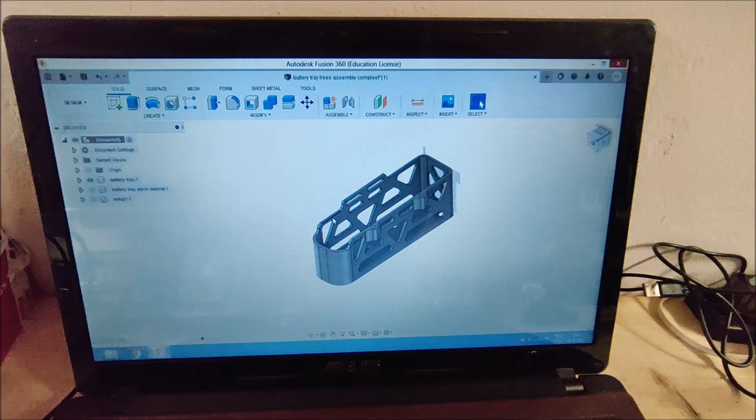Today I want to try to machine this small battery tray to house this battery in the side of this robot project I'm working on. It's a part that can be machined on a 3-axis machine, but since I now have the 5th-axis trunnion, let's try to make it on there, because this part at least has 4 sides to machine. This side, that side, from the top, and there are holes on this side.

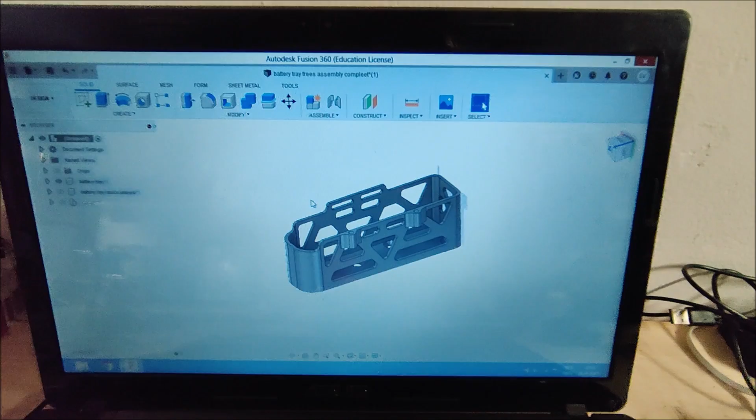So this is the end part. I modeled the stock around it, where we're gonna machine the part out, and I have my trunnion dovetail clamp. So here you can see where we're gonna hold the part.

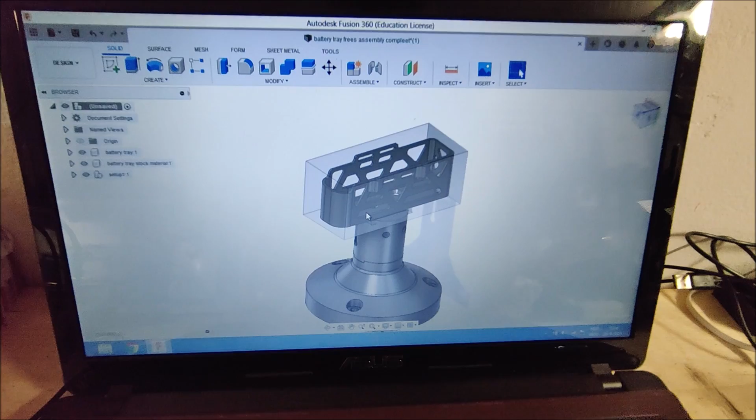I want to try to record and explain the steps I'm gonna take to make this part. I'm not sure if I'm gonna take the right steps, because it's the second time I'm gonna machine a part with the trunnion, so I'm not sure if it's gonna be the right workflow, but let's see, and maybe we can learn some things today.

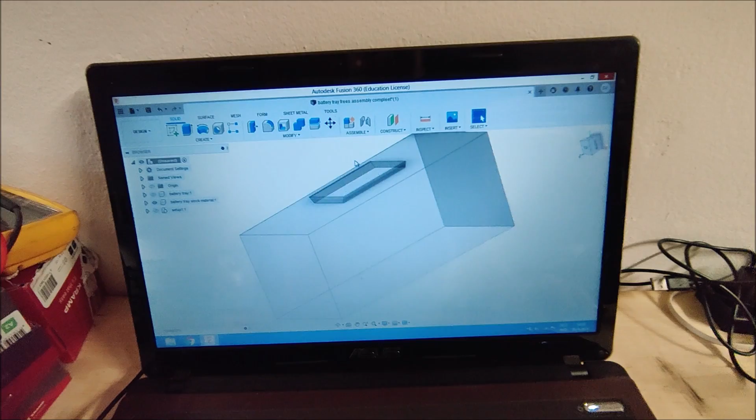So the first thing I need to do is machine this dovetail on the stock material. Just do that in the normal vise, and then after that we can grab this piece of material in the trunnion. So let's make the program to cut the dovetail, cut it, put it in the trunnion, and then I will explain how I set the Z height again, like I explained in last video.

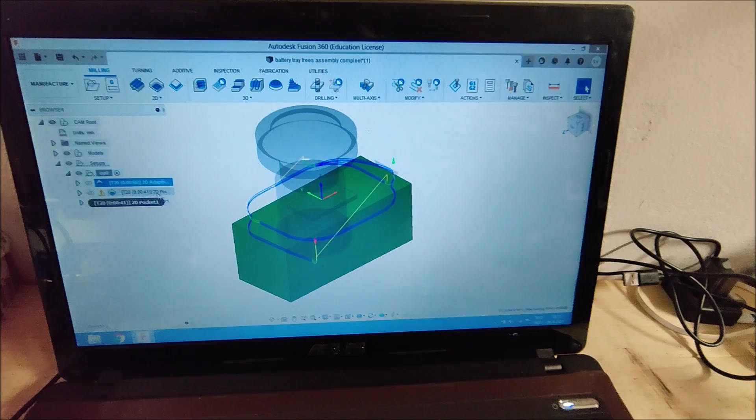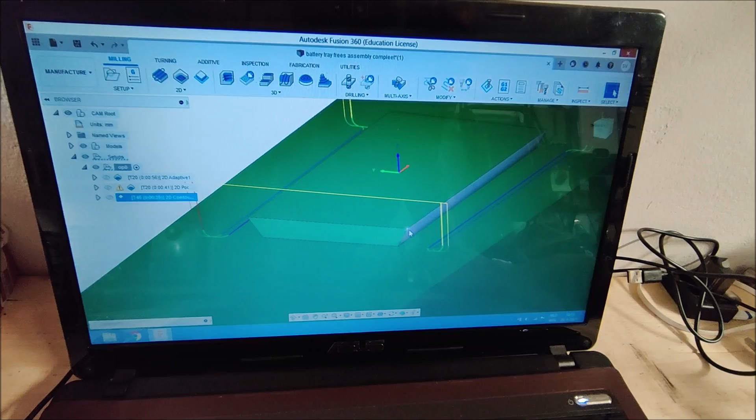I created the program for op0 to machine the dovetail. So first thing is rough out the top material with the face mill, then finish it so only this square remains, and then use the dovetail cutter with some multiple passes to cut the actual dovetail, and that should be enough to hold the part in the dovetail vise.

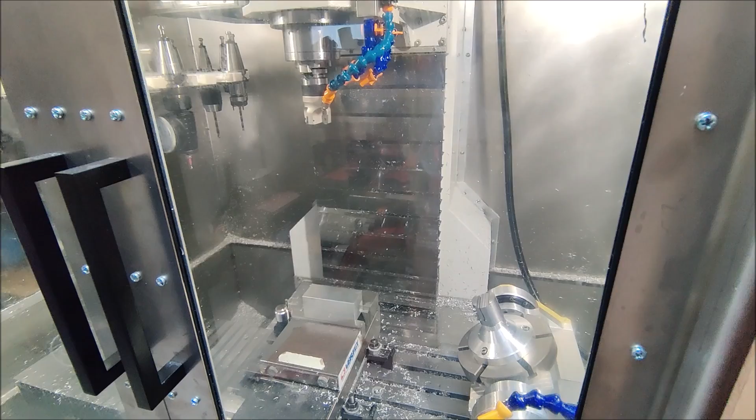So let's put the material in the vise, set the 0 point, and run the program. I loaded the stock material, set the 0 point, and did the spindle warm up. So now let's run the program.

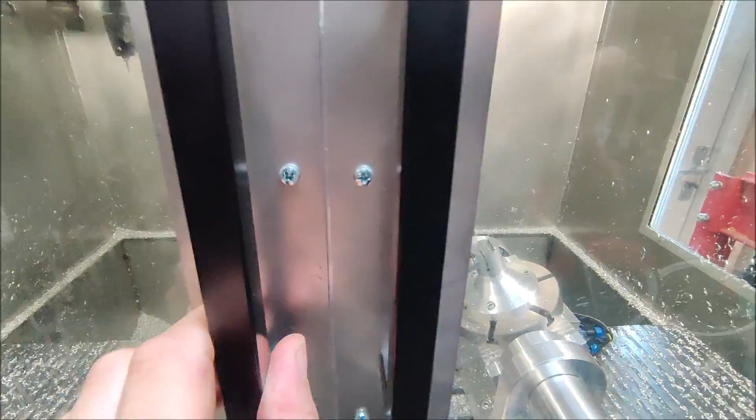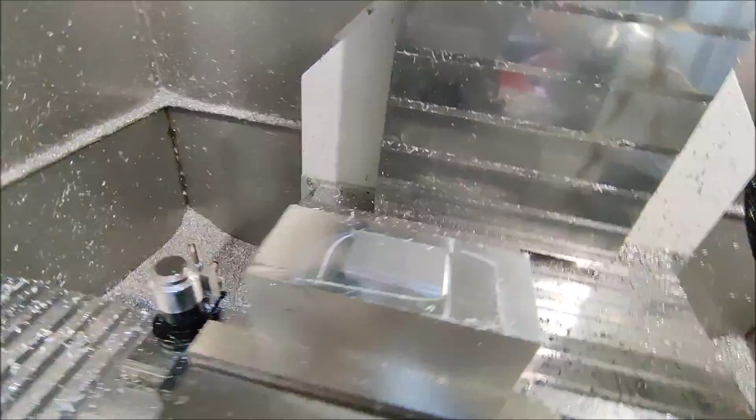Now let's run the dovetail cutter and cut those dovetails on the side. Loaded the dovetail cutter, let's run the next program. So now we can transfer the part to the dovetail, and then set the 0 work point for this stock material.

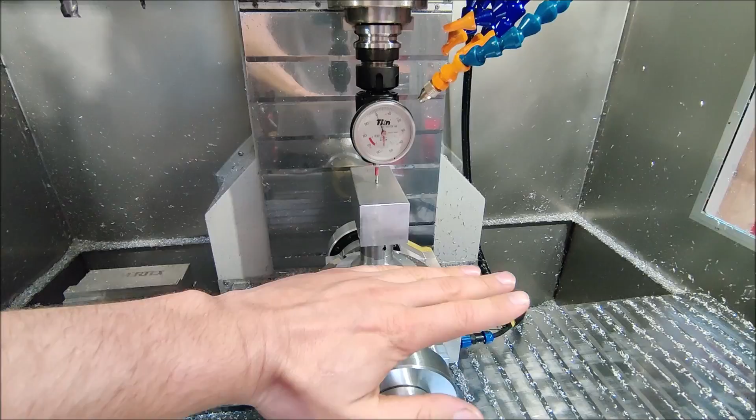I mounted the part in the dovetail clamp, and I made sure that this side is parallel to the y-axis now, and I set the c-axis to 0 degrees in this position. The b-axis is now also at 0 degrees, and it can tilt down to -90 or +10.

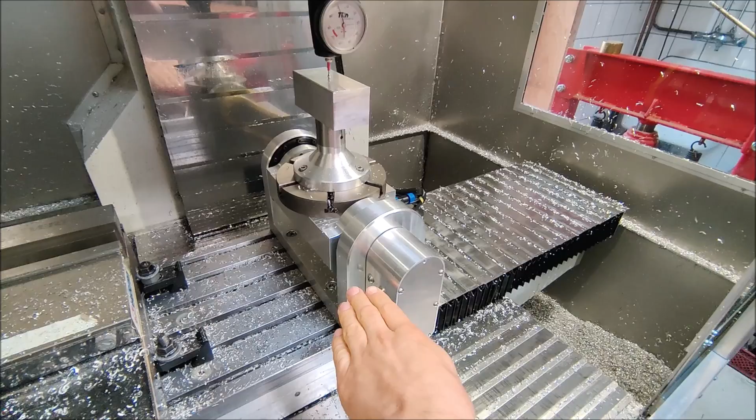Because my controller doesn't have the tool center point control, my work coordinate system is in the middle of each rotation axis. So I need to set the work coordinate system somewhere here in the middle of this axis and this axis. The only thing that is unknown for me is where the part is in space relative to the work coordinate system.

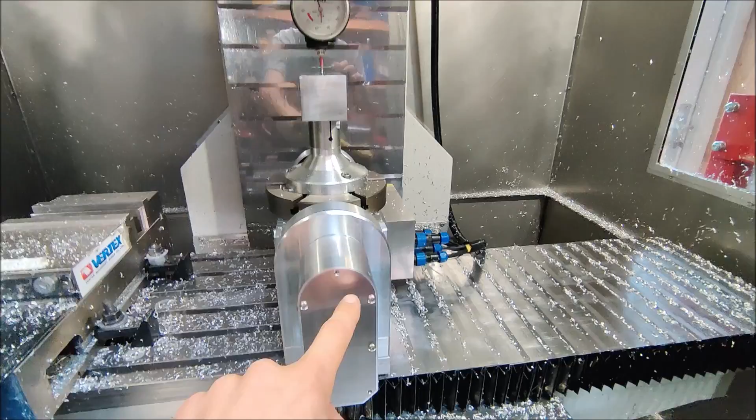So what I do is I put my machine in G55, the work coordinate system I use for this trunnion, and then I use the Haimer to measure the top of my stock part. I know that the 0 point is here. I put the Haimer here on 0, and then I can take the height difference to model up the top of the stock in Fusion.

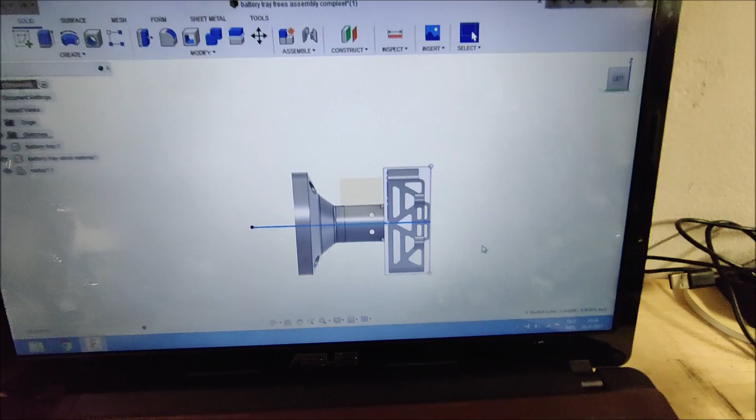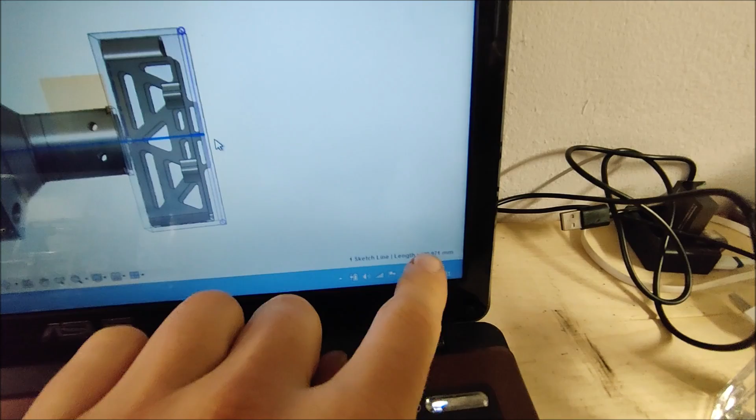So let's go back to the computer and make a sketch, so we can set the work coordinate system offset from this point to below there. So what I did is I made a sketch on the center plane straight through the middle of the part, and I drew a line which has exactly the length that came out of the z-axis measurement, and then I created a point on the end of the line, and this point will be the work coordinate system center point. So from now on, Fusion will know where the stock is relative to the 0 point.

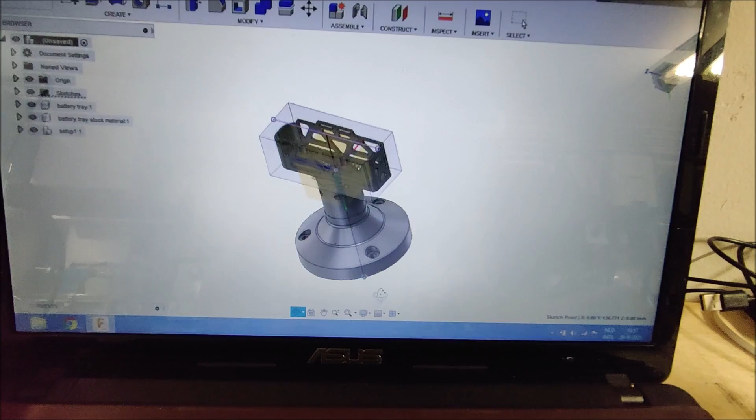This is now how the setup looks. You can see the coordinate system is at the bottom of the point of the sketch, and the x-axis is in line with the long side of the part, just like how it was now fixtured in the machine.

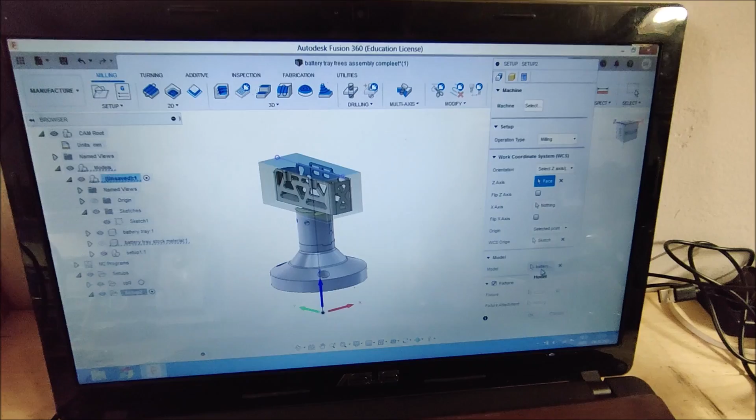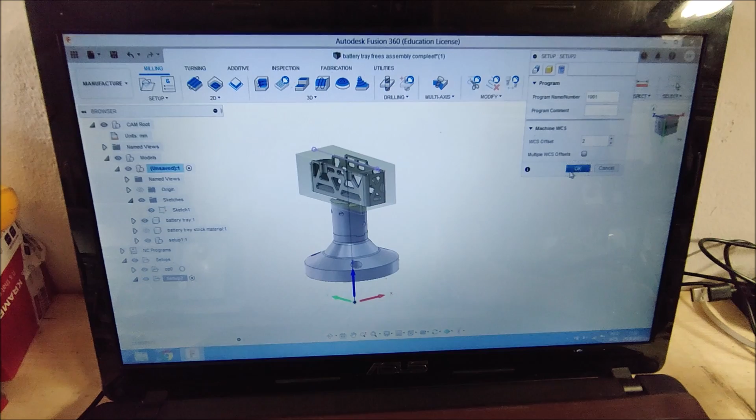For the model, I used the model of the battery tray. I set the fixture, I set this part, and for the stock I used the modeled up stock, and I did a work coordinate system offset, so it will output the program in G55. I already made this mistake, don't do it, and then the machine stays at G54 and you get some interesting things. Luckily I was in time to catch the problem. So now we have all this set, we can start making programs on machining this part.

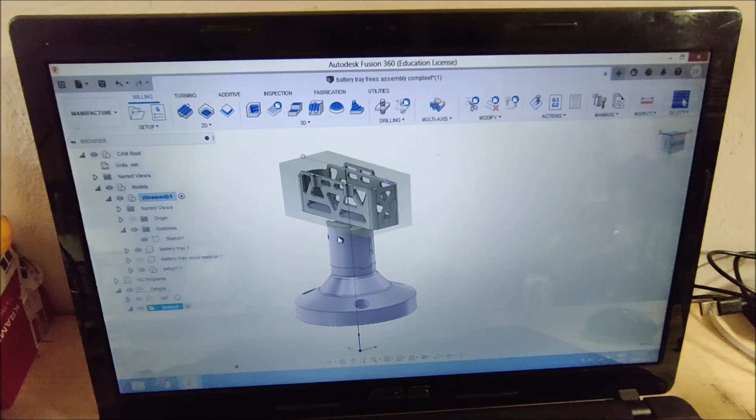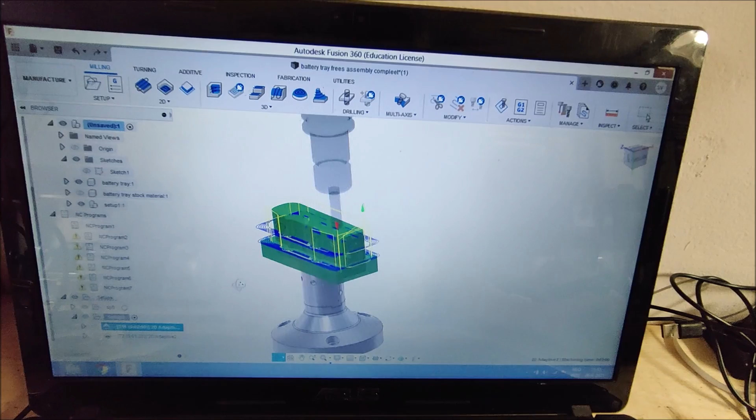I created the first 2 programs. They will rough out the outside to the shape of the outside contour, first with a short 10mm tool, and then with a longer one to reach the bottom. For this operation the trunnion doesn't have to move, I can just stay straight up, just like it's a 3-axis move.

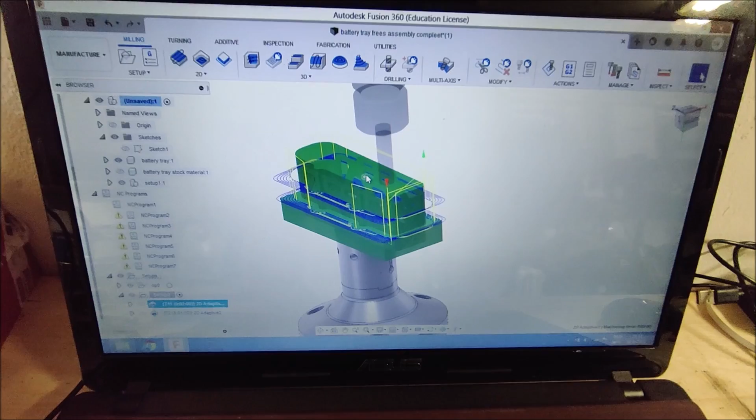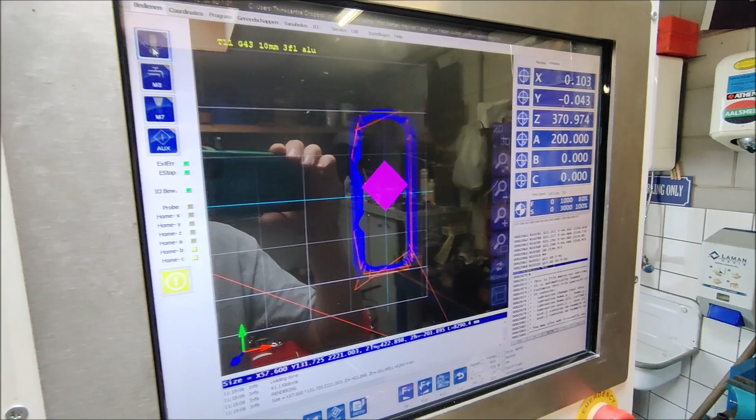I first want to finish the outside contour like this, while the part is still as rigid as possible. If there will be some chatter on the inside, I think it's less of a problem because you will not see it, but I want to try to make the outside as clean as possible. So let's run this program and see how that goes. The program is loaded for the first step. I'm gonna hold my hand on the feed control so I can see what happens in the first stage of the program. So let's run it.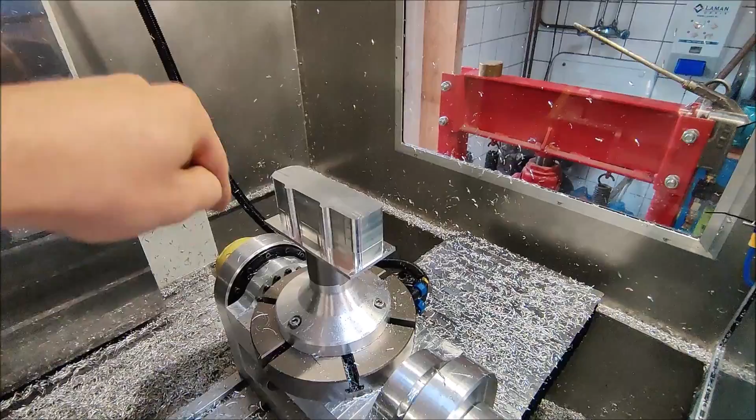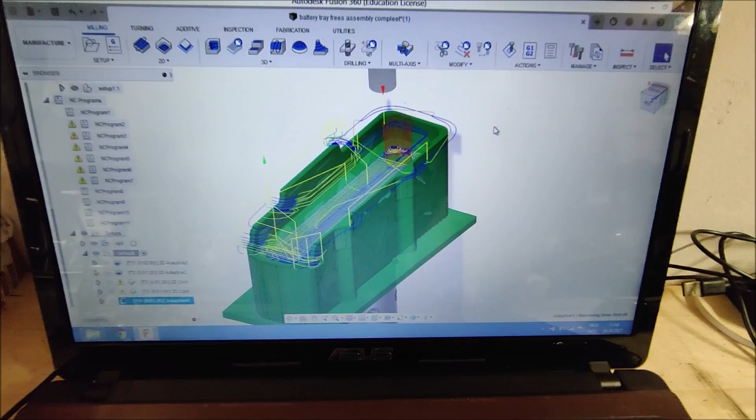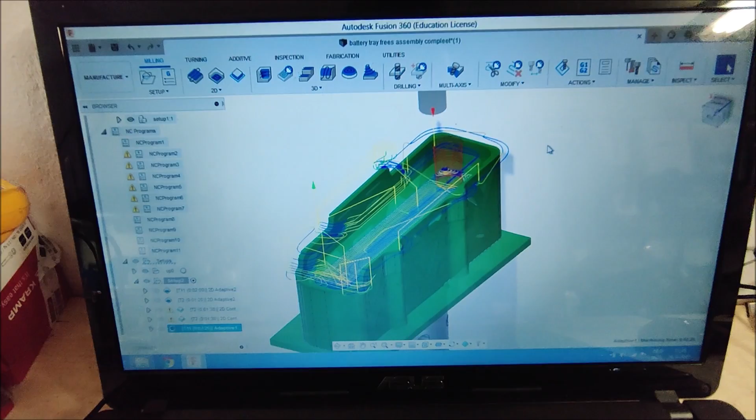The outsides have now been roughed out. Now let's make a program to finish the outside contour, and then let's work on the inside. Now that the outside has been finished, the next step I want to take is 3D rough the first 15 millimeters from the top part, so the top layer will get exposed, and I can finish that while the top part is still rigid. So that's what I'm gonna do now. First rough it, and then we're gonna finish this whole outside part to make it look good.

The first 15 millimeters have now been roughed out. What I want to try to do is use a 6 millimeter end mill and machine from this side to finish this half, flip it, and then machine this half, and then I can also see how nice, or if it's aligned at all, to see if you can see a mark in the middle. If the end mill goes from this side and this side, what will be the difference in the middle. So let's make the program, and then we can also use the 3+2 function and tilt the trunnion. So let's make the program for the machining on the side.

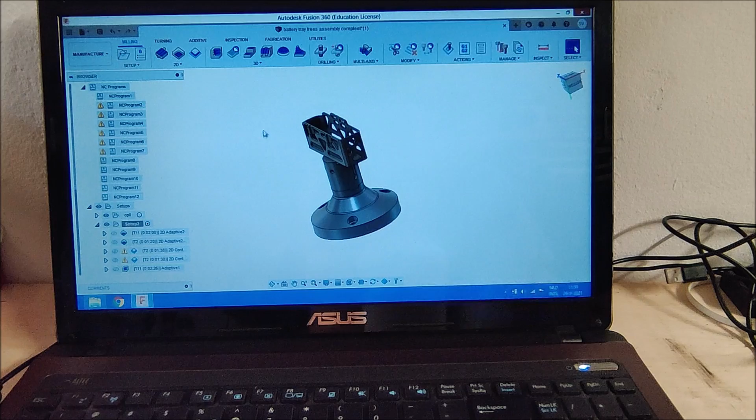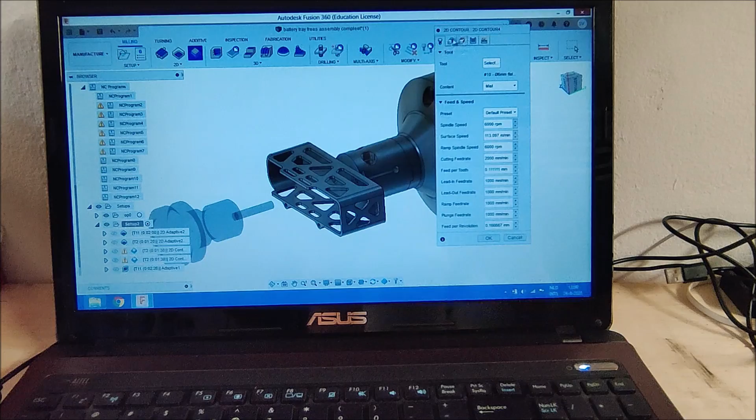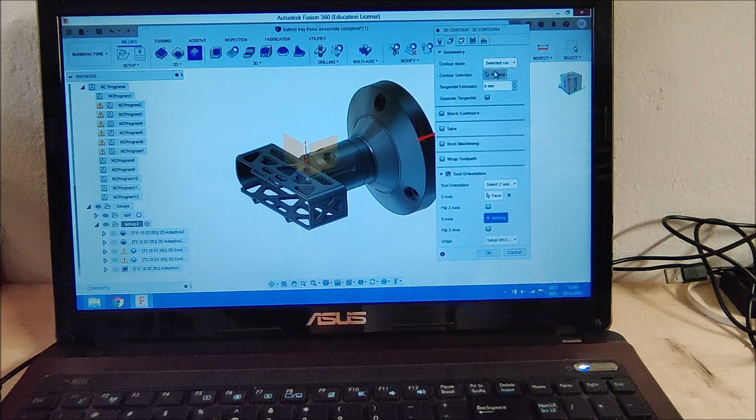So what we're gonna do is select contour, tilt the trunnion like how I want to have it, and first thing we need to do is select the right tool, and then tool orientation, and we need to give the trunnion a new z-axis. So you can see the z-axis now pointing upwards. For x and y you don't have to touch it, Fusion will figure it out itself. Then we can select the contour, and all I want to machine is this side, so I'm gonna mark what I want, okay, and from the top it will look like this.

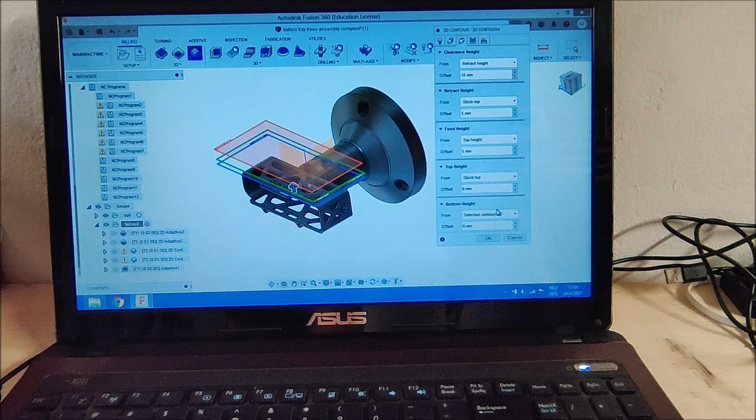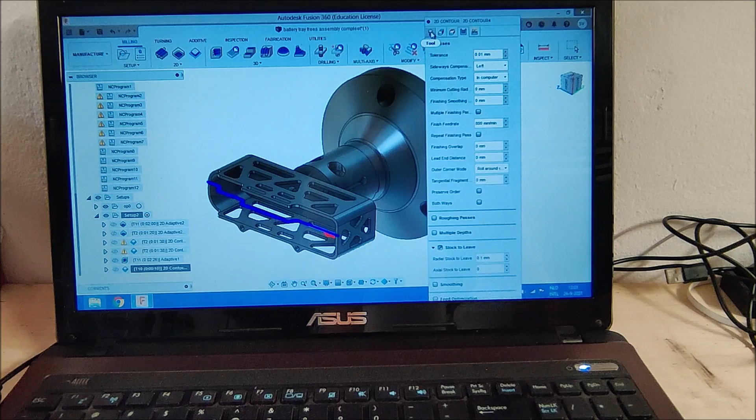And then I need to set the right height, and I want to go here, -10, which will be exactly in the middle. So let's do 0.5 millimeter deeper, so we have some overlap between the two passes on each side. And I will set top here, and that should give us our program. So I'm first gonna do it with a stock to leave of 0.1 millimeter, and then I can first verify in the machine how the program looks, and then we still have the 0.1 millimeter escape if it doesn't turn out how I want to have it. So let's post it and put it in the machine.

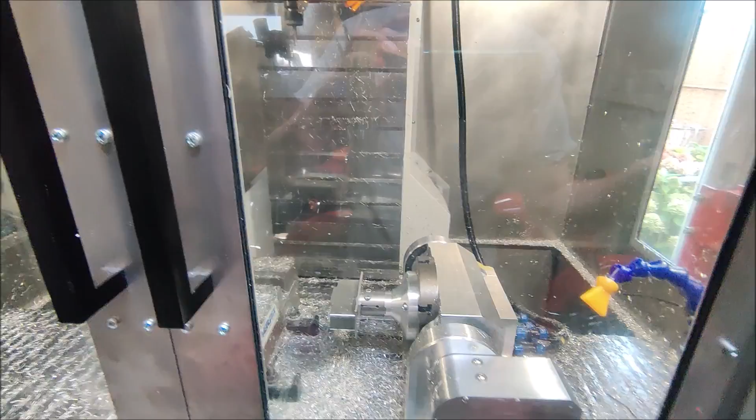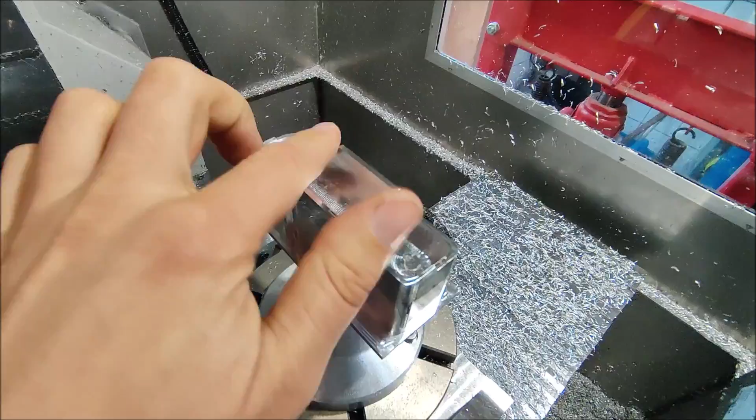I loaded the program and loaded the tool already. Let's run the program. I'm gonna hold the feed button again to see if the trunnion does what I want it to do, and see how it's gonna turn out. Okay, that looks like what I wanted. Now the question is, if we rotate the Z-axis, put B down, and we do exactly the same thing on the other side, how this intersection will look. So let's make that. I will make that program, and then we're gonna put it in the machine and see.

I loaded the program for the other side now. I'm gonna put the feed low, so first I want to see how the trunnion is gonna move, and let's see. Yeah, looks good.

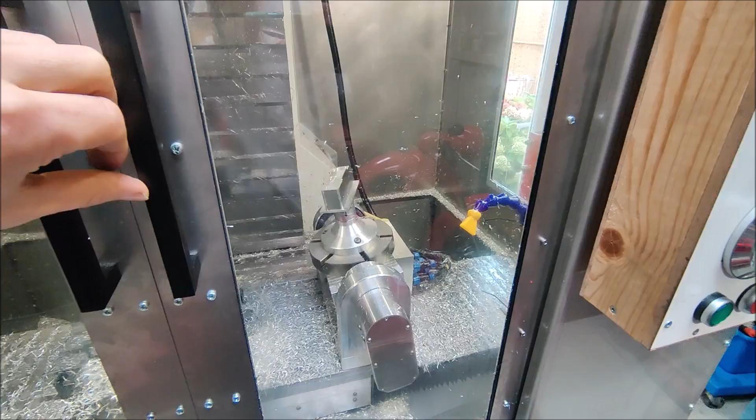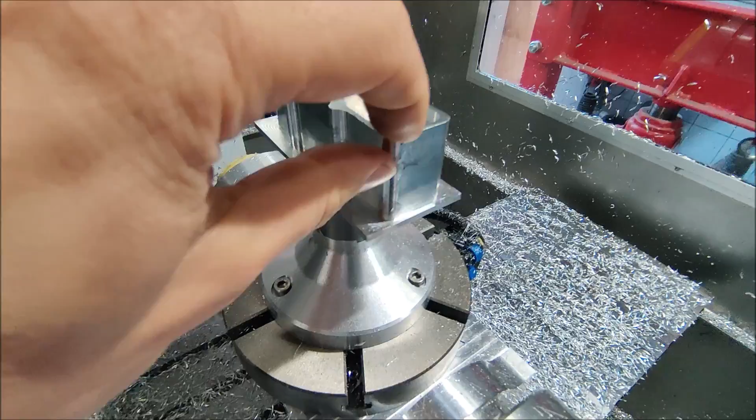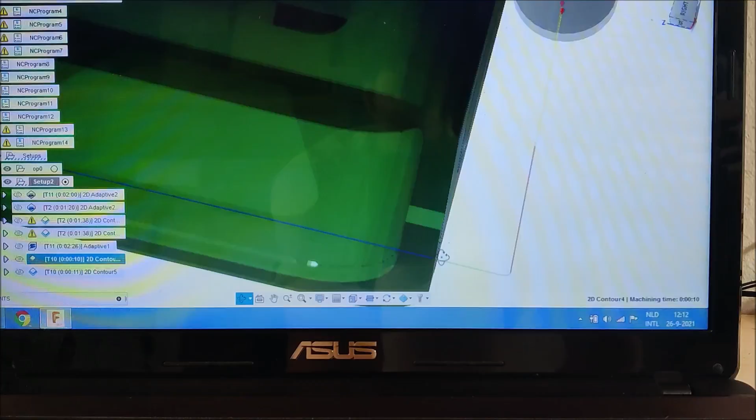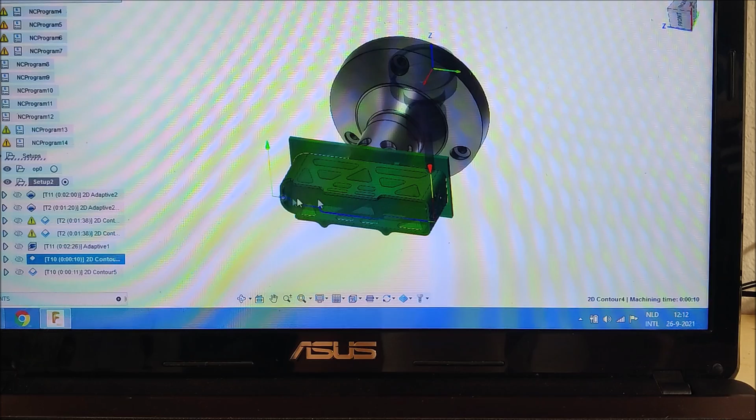Let's see. You can feel something, but I think it has more to do with the lead in, lead out than an actual height difference. So let's see if I can optimize the program a little. I modified the lead in and lead out a little, so it goes in straight instead of the loop. I adjusted both programs, and I set the stock to leave to 0.05 of a millimeter. So let's run this program again, two programs at the same time. So in the middle of the program the trunnion will move, and we'll see how the transition between the two passes will look.

Spindle will get out, rotate the part, spindle will come back. Let's look. Nice. There is still a little bit of height difference, but almost invisible. So I think for a home built trunnion, the aligning is for now good enough.

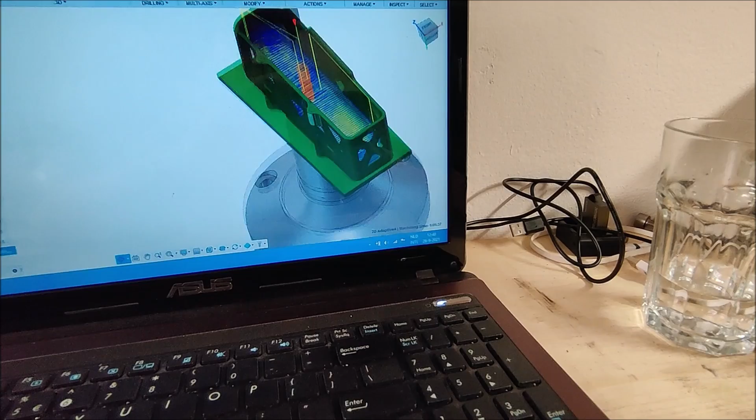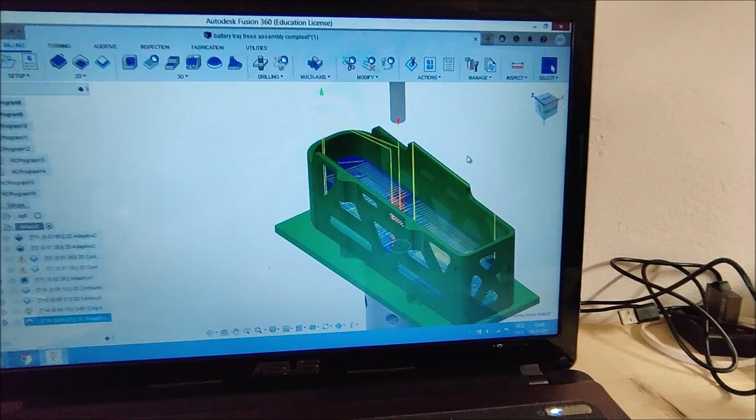Now next up is to rough all the inside. I'm first gonna drill a hole, and then I located my helix entry of the adaptive clearing there, because I cannot use flood coolant yet. I always have trouble that the end mill gets full with aluminium on the helix approach, so with this pre-drill there's less material for it to remove, so hopefully it doesn't clog up.

The inside of the battery tray is now roughed out. Time to make the finishing program, and then we can work on milling all these holes around.

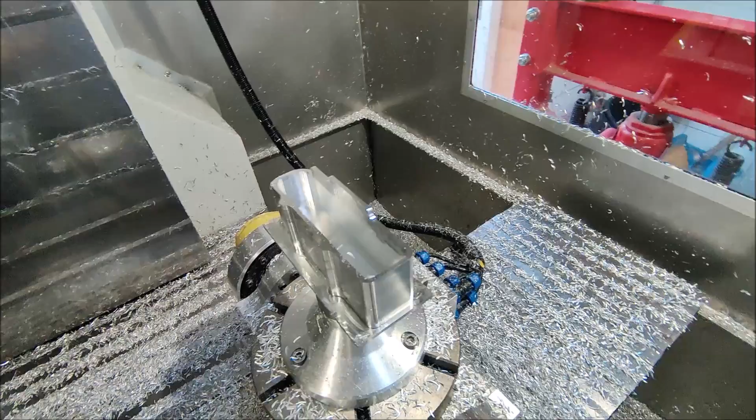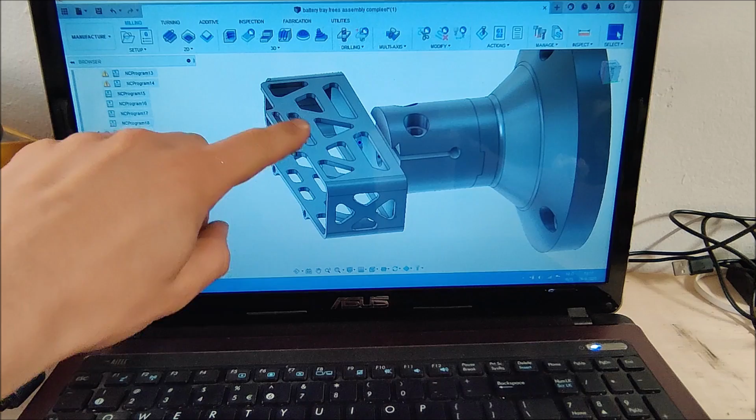Now that the inside is finished, it's time to machine all these weight-saving holes in the sides. I want to start from the top and work my way to the bottom to keep the part as rigid as possible. So first I want to do these two, then the 4 top ones on this side, then this one, rotate the part and do the other 4 top ones, rough them out, finish it, and then start on the lower ones and do the same thing. And I think I'm gonna do it in 3 parts.

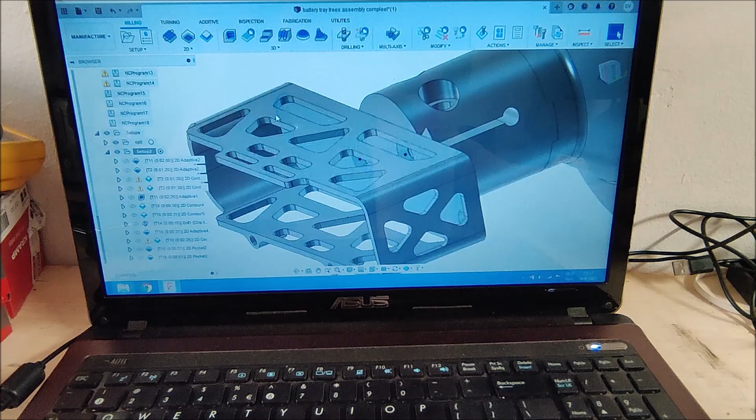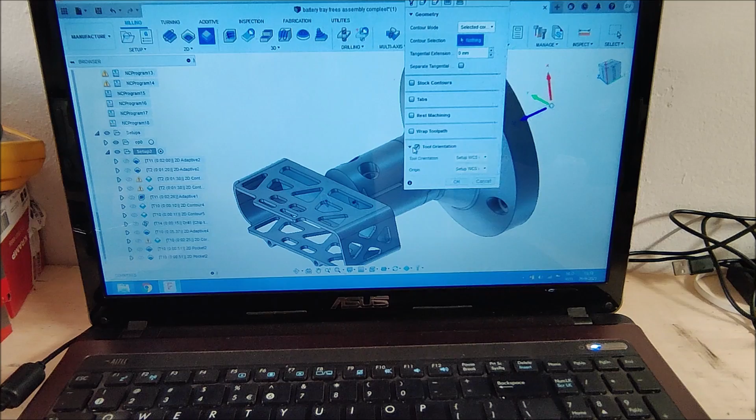So let's make the program for the first 2 slots. I'm gonna use the contour function. I'm gonna select my 3mm end mill, and first we need to do is the tool orientation again. So just rotate the part or the trunnion how you want to have it on the machine, and then select the new Z-axis. Again, you don't have to bother about X and Y, Fusion will figure it out themselves.

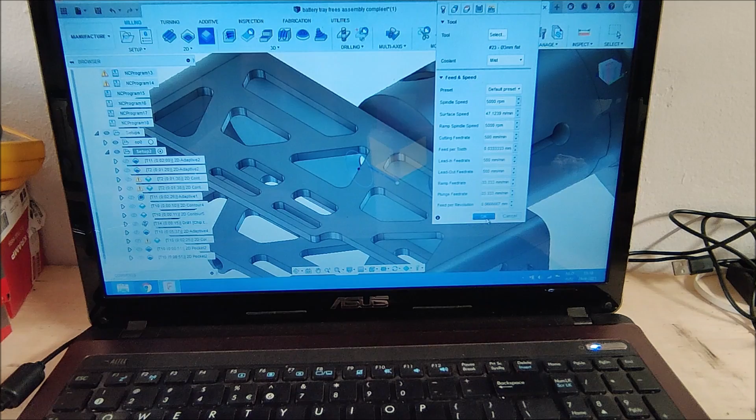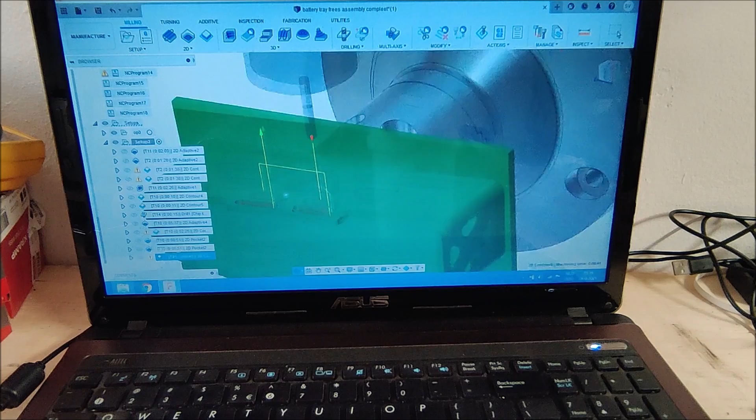Then we can select the right contours, so these two. Stock to leave, let's go 1mm lower, so we're 100% sure we break through, and we're gonna use the zigzag to get inside, because there is no space for the tool to have a nice lead in. And let's set the top at this height, because the material is already gone. So that's this side. Program is loaded. Let's machine the first slots and pockets on the side.

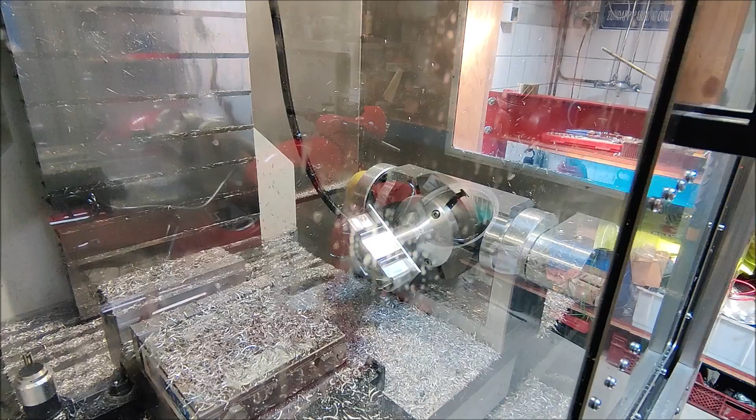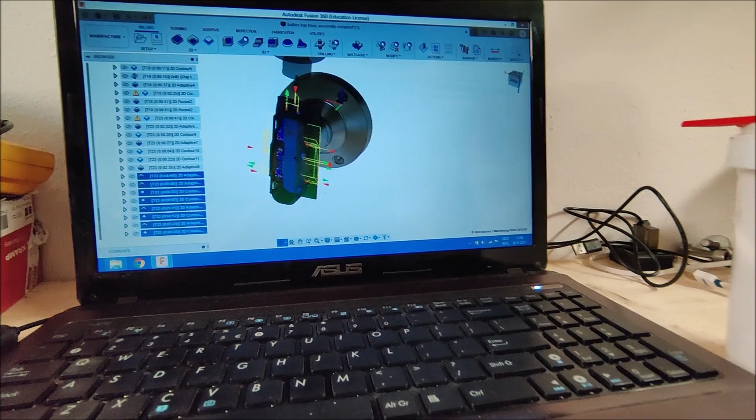Pockets on the first side, on the first layer, are finished. I already made the program for the pocket on this side and the first pockets on this side. So let's run that program. I think the part is still rigid enough to do the last pockets all together. So I made the program, and I'm gonna post it as one big program to machine all the remaining pockets at once. So let's post it.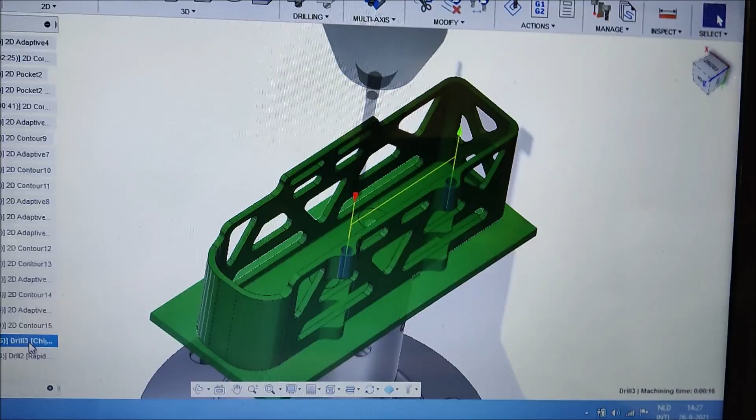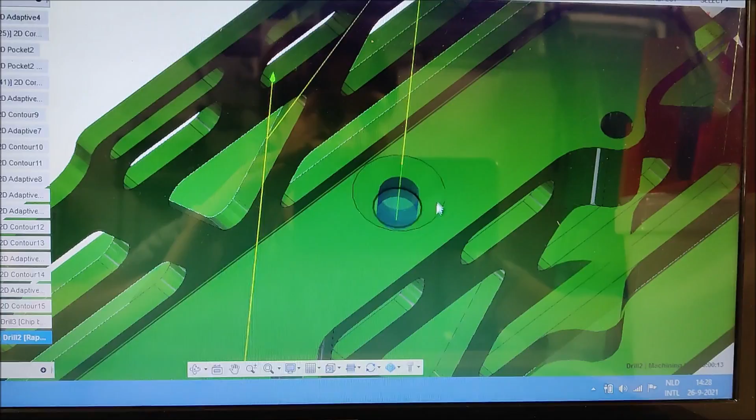Next up is drilling those 2 holes for the cover plate that needs to keep the battery inside, and drill those 3 holes in the bottom where I will mount this bracket to the frame plate of the robot. And then I want to do a 3D contour to machine this countersink, which I cannot reach with a normal countersink drill. So I need to mill it in.

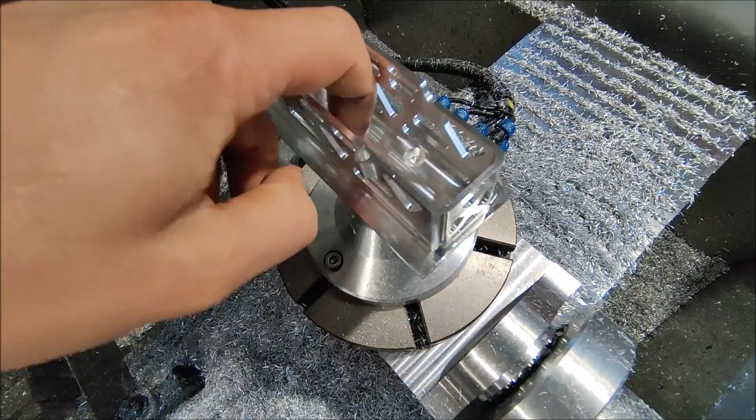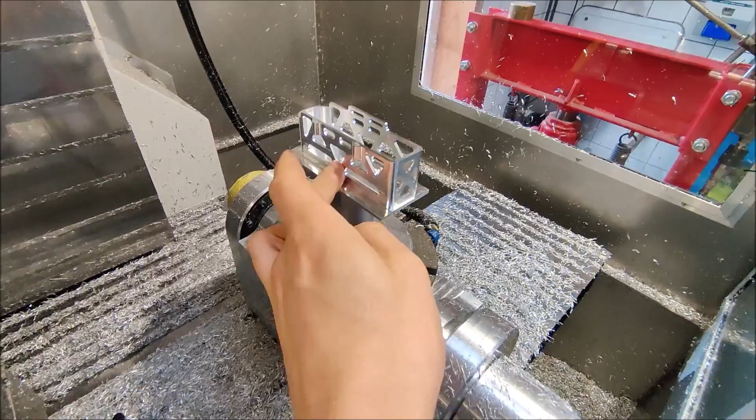Finished the machining of the countersinks. It was a little bit sketchy because the tool is pretty thin and has a high stick out, but I think it turned out good enough. Last thing I need to do before I can remove it from the dovetail clamp is chamfer it. Unfortunately, I don't have a back chamfer tool, so I can only chamfer the front sides, but the inside is not sharp at all.

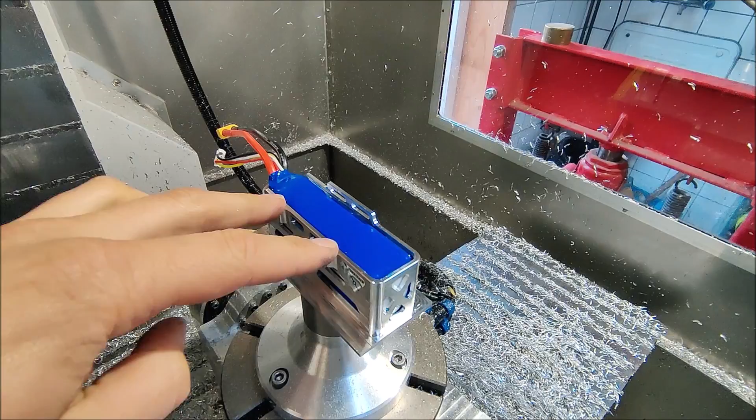Op 1 is now finished. All pockets I can reach have been chamfered. Battery fits in perfectly. There will be a cover plate with 2 forks going inside these slots, and then 2 bolts to hold it on this side, so the battery cannot get out. So what I now need to do is get it out, put it back in the vise, and face off the back side, and then we should have a finished part.

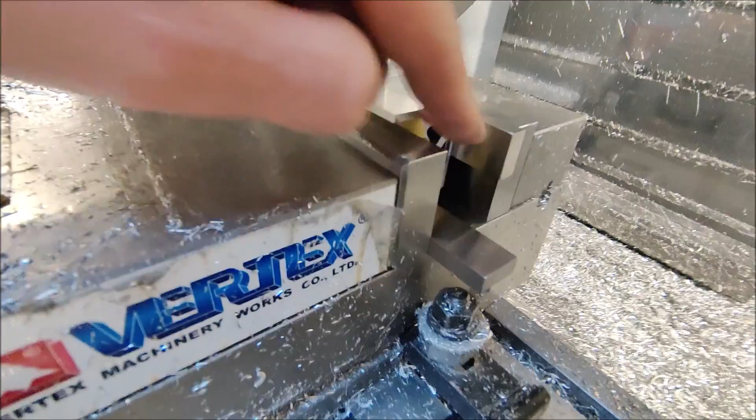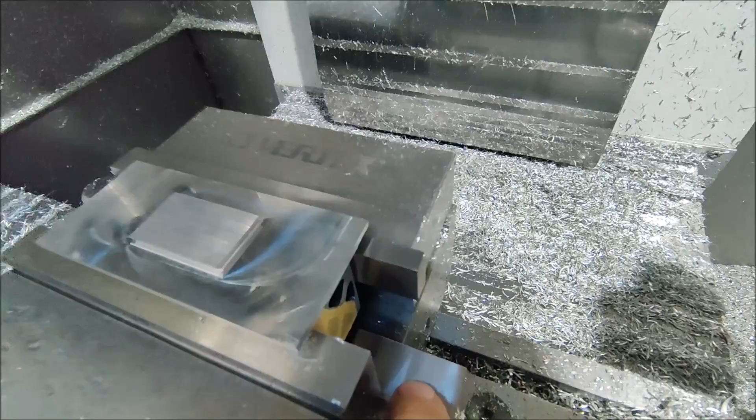For facing off the back side, I put the piece back in the vise. I use the parallel here so I can clamp it, because there are the notches for the bolt. Z0 is the top of this parallel where the mounting lip is resting on, and for X and Y I put the middle of the stock. So now I'm first gonna adaptive clean this flange off, which is sticking out, and then I can face mill it to the correct height.

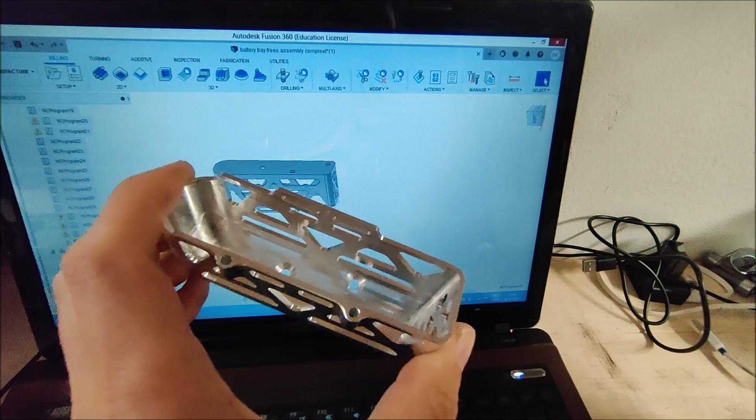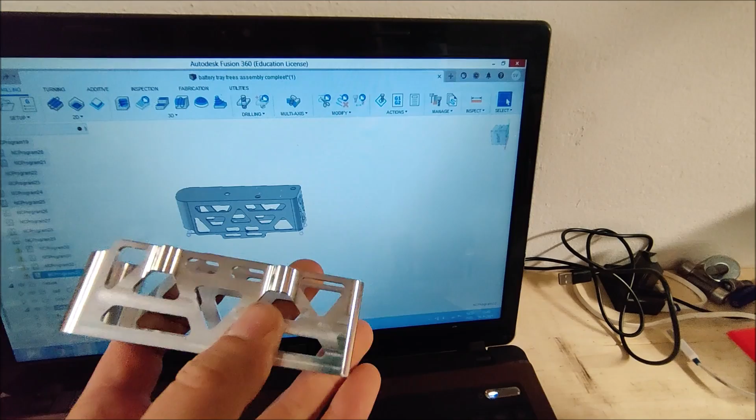And here we have the finished battery tray part. It didn't turn out too bad. There are some things that I should have done differently. I forgot that these notches will extend till here, so I manually jogged an end mill around it, but it chattered like hell. So this finish is not nice anymore. I should have already cleared this side when the inside wasn't milled out. Things to keep in mind for next time and other thin objects.

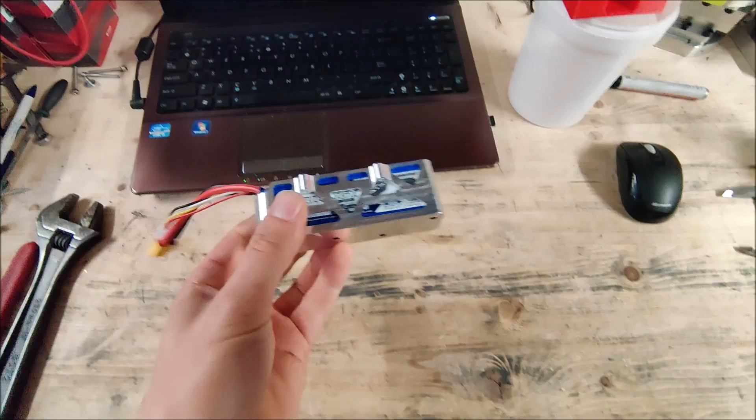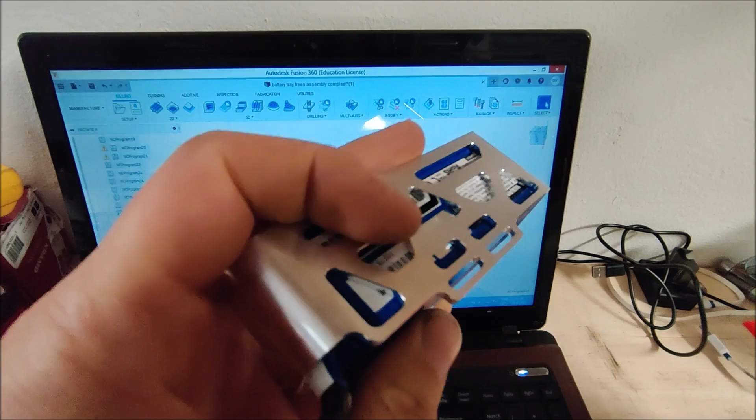Battery fits inside nicely, so now I can make the cover plate. But this will be the end for this video, to show you guys a little about how to make a part with the use of the trunnion.